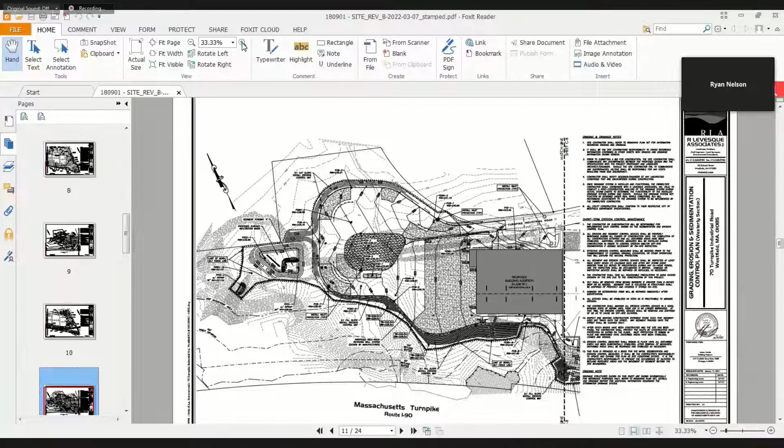Let me pull up the plan here. So Tom, I'm assuming you read all the comments? I did. I didn't understand a lot of them, but I did read them. Yeah, there's just technical things that, if I remember, let me see if I can pull up one of them.

Comments were about the operation and maintenance plan, which is, as you know, the long-term plan of how often things should be inspected, how they should be cleaned out, at what intervals. So there were comments about that. There was construction sequencing, just clarifying that, which was included on our plans. We added the snow storage locations. I guess to answer your question, it's just a large area of proposed surfaces with a decent pipe network system with multiple stormwater structures.

So it was just fine tuning and clarifying and tying up loose ends on all those items. Right. Was there also something about a pipe that wasn't adequate, wasn't big enough? Yes, let me see if I can find that.

I don't know if you can see this comment letter being shared, but number 5 said the hydraulic analysis included in Appendix D of the stormwater report identifies drainage pipes with flow exceeding the pipe's capacity. Please review and adjust pipe size if required. Our response was the hydraulic analysis performed on the pipe network utilized the 24-hour 100-year storm event, and while some surcharging within the conveyance pipe is anticipated, the analysis did not result in water surcharging above the rim elevations of any drainage structures in the paved areas.

So what that means is, although the stormwater flows may during a peak time exceed the capacity of the pipe, throughout the whole length of the pipe and the stormwater inlet structure itself, it had enough volume to hold and contain all that peak flow. So it didn't back up enough where it surcharged out of the inlet or the catch basin and into the parking area. Huh, I see.

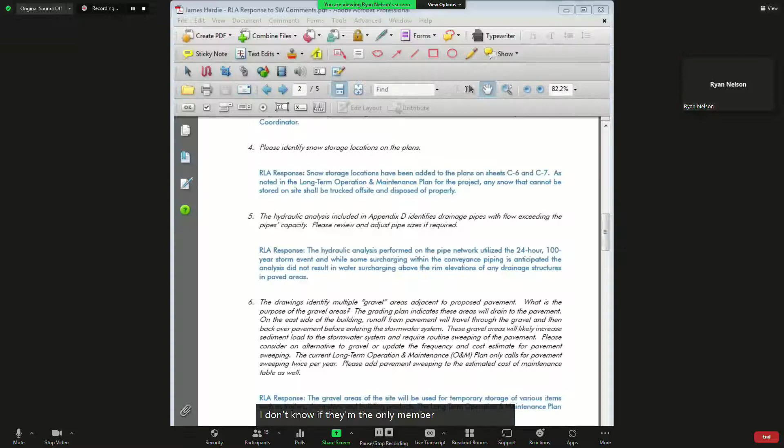Excuse me, Ryan, I cannot see the letter. I'm just looking at a charcoal screen on the left side. Just wondering if you could look at that again. I don't know if I'm the only member. How about that? Does that look any better? Yep, now I can see it. Okay, thank you. Sure, thanks.

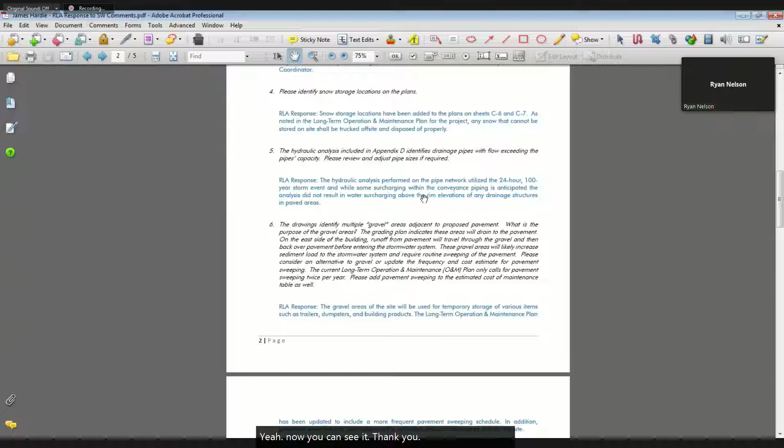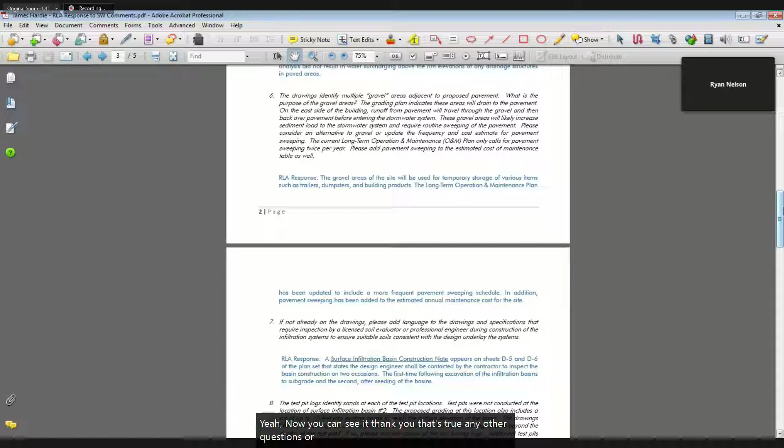Any other questions? I guess I'll just add that Colleen did forward that to me, and I was rather impressed with the responses from you guys. They certainly answered any of my questions.

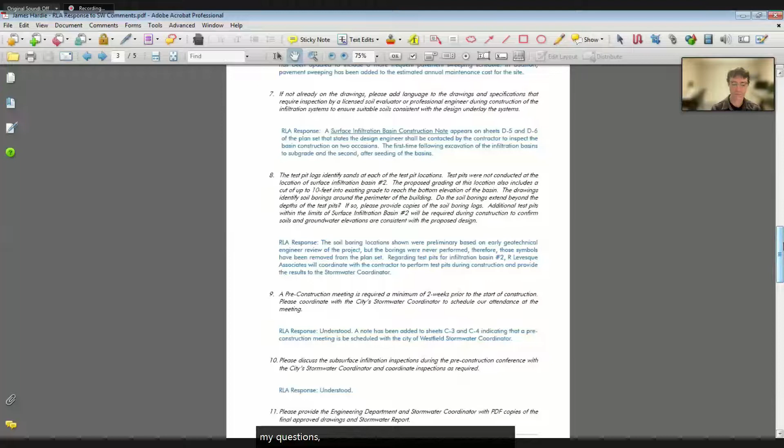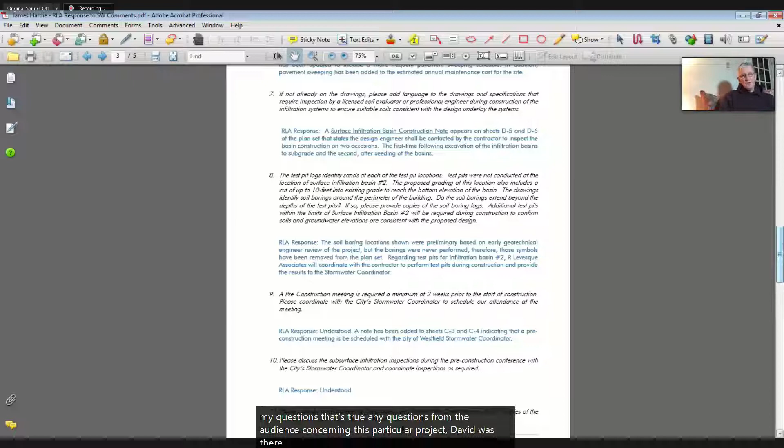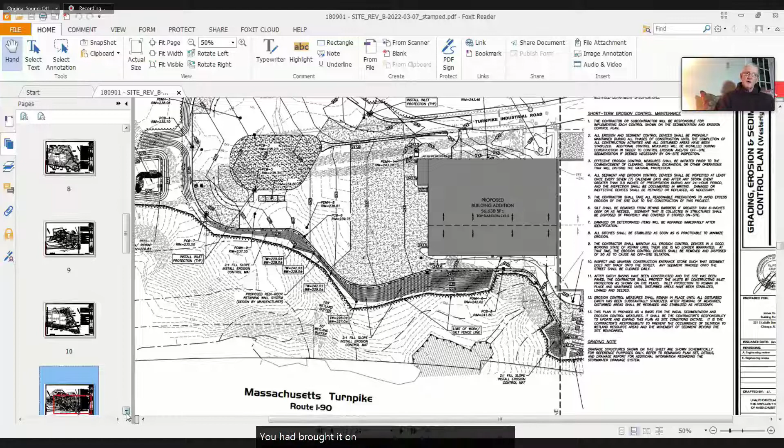Any questions from the audience concerning this particular project? David, was there one part of this? I'm trying to recall the original drawing, but there was one section where the new project came awfully close to the 50-foot line, if I'm remembering correctly. Do you recall that was your issue? You had brought it up. Am I remembering this correctly? There is a spot. You want to show us that, Ryan?

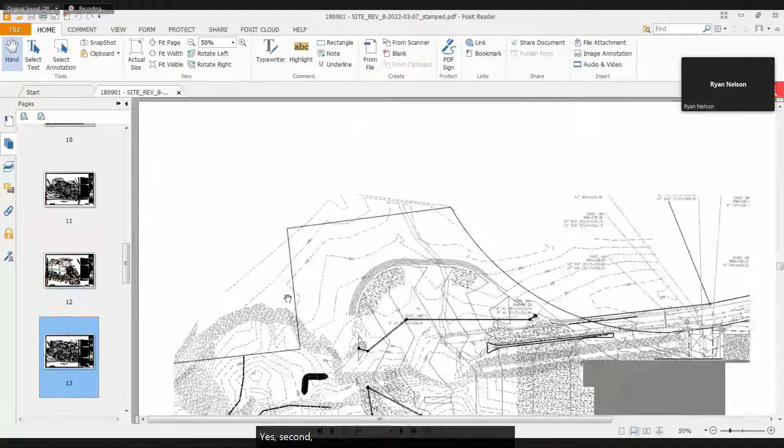Yes, one second. Okay, so this heavier, darker line here is the 50-foot buffer. Although our silt fence goes along the top of slope, our edge of pavement line isn't being expanded. So there's a strip of grass alongside the paved area within the 50-foot buffer, but it will remain grass. We're not doing any new work within that inner 50. It's just this little sliver right here between the silt fence line and the 50-foot buffer.

If I'm standing out in the road, looking at the existing building, where exactly is this? Is this the far right corner? Yeah, if you're standing at the main road looking at the building, this is the back right corner.

All right, but not a concern, is that what I'm hearing? They're keeping it as a grassy area. Plus, there's a steep bank right next to it, so they're not going to get down into that bank and disturb that. Correct.

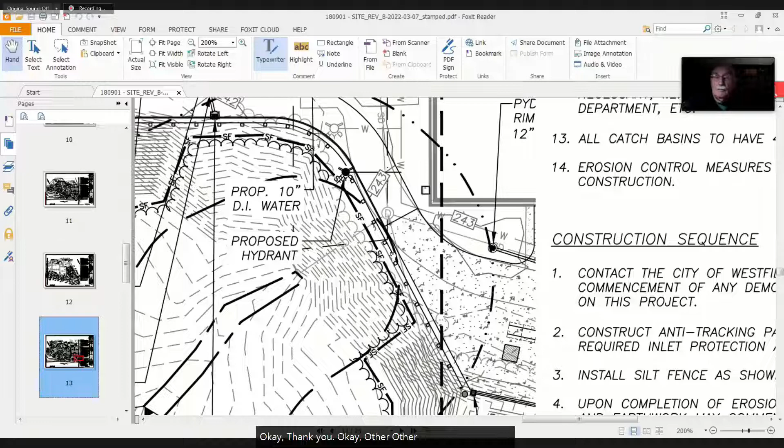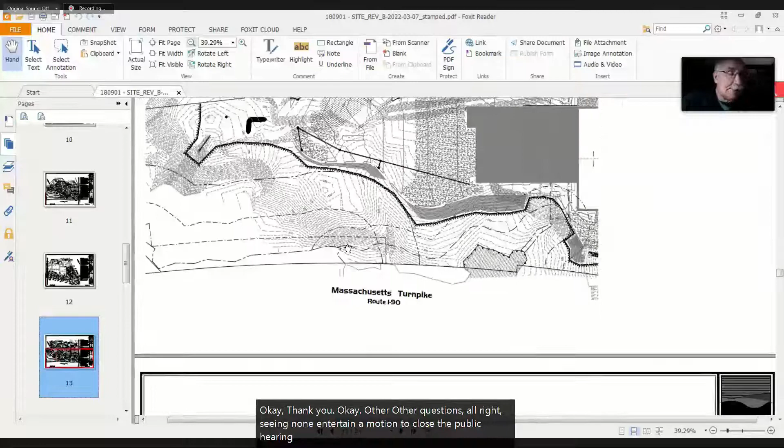Okay, other questions? All right, seeing none. I'll entertain a motion to close the public hearing. So moved. Do I have a second? I'll second it. Okay, any further discussion? Seeing none, all in favor?

Jim, yes. Carl, yes. Bob, yes, yes to close. And Tom, yes. Thank you, yes. And I'll vote yes as well. Okay.

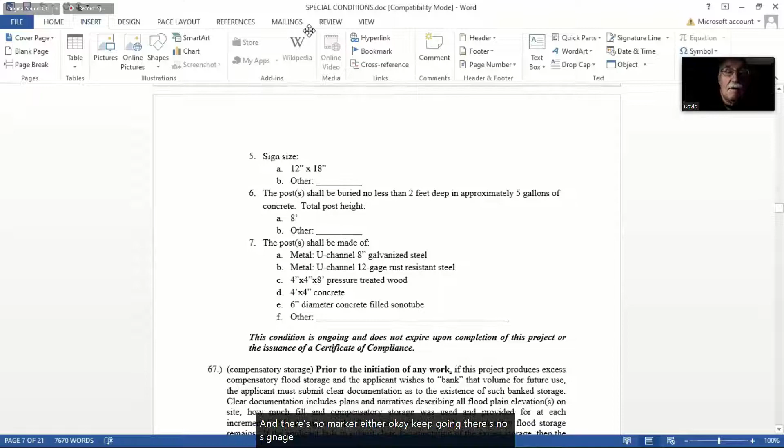There's no Title V, Ryan. I don't think. And there's no water quality certification, no. Sorry, there's no markers either. Okay, keep going. There's no signage. There's no storage. No basins.

69, okay, they were going to tag trees on the limit of work before the pre-construction meeting. So just make a note of that, Colleen, so that we can know where their cutting is going to stop. So what do you mean by that, David? Within 100 feet of the resource? Well, the limit of work. They're cutting a lot of trees, but they're going to mark the edge of the cut so that we can look at it in the pre-construction meeting. All right, good, yes, that's good. Yeah, on the plans there's a limit of work. We want to make sure they don't cut beyond the limit of work. Okay, so they're going to mark those either with tape or some kind of way, and we'll check that at the pre-construction meeting.

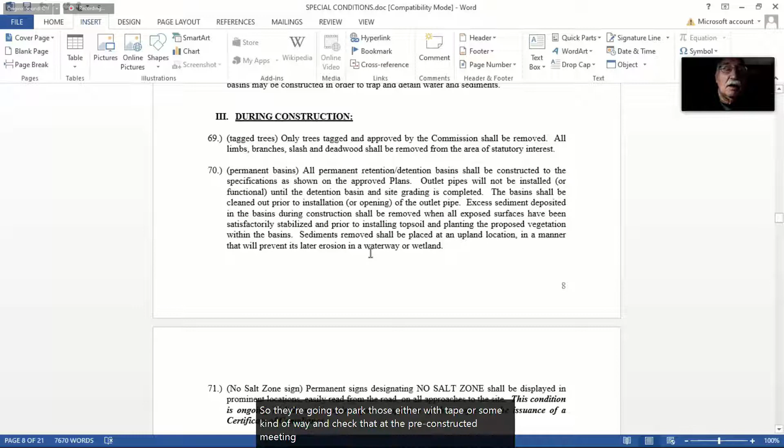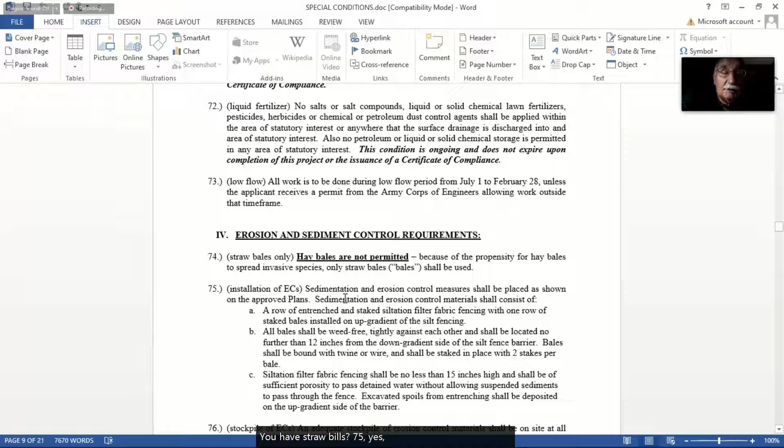Okay, 70, there's no basins. 71, we don't need that one. There's no 72, we don't need. 73, we don't need. 74, yes, straw bales. 75, yes. And 76, yes.

78, that might be a good one to check off because there's going to be a lot of area that's cleared of trees. What's the opinion of the committee on that one? Yeah, that seems reasonable to me. I'll echo that.

All right, thank you. Silt sacks, yes. 80, yes. 81, yes. Okay, stormwater requirements, yes, 82. 83. 84, yes.

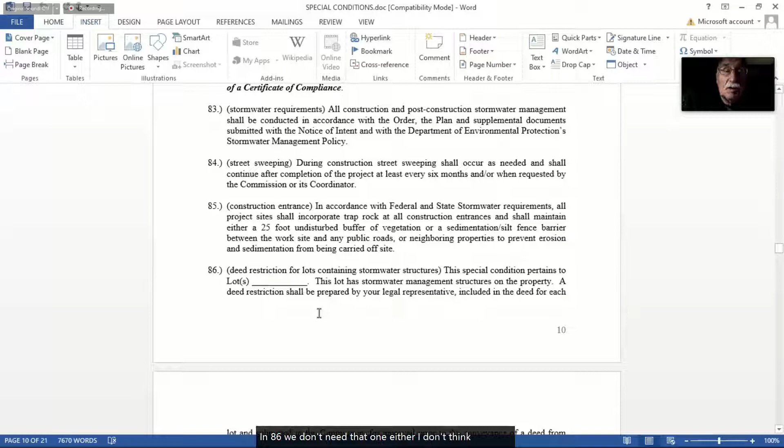There's already an entrance to the site, so I don't think they need an initial construction entrance. 86, we don't need that one either, I don't think.

There's no environmental monitor required here, so we can skip those. There's no dewatering. There's no dredging. There's no replication.

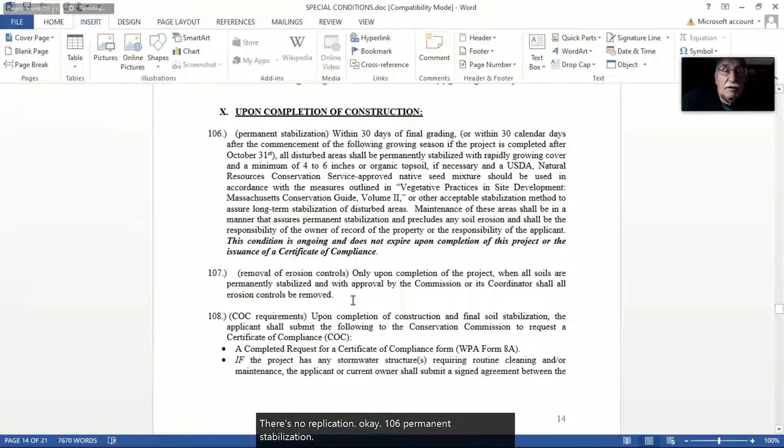106, permanent stabilization, yes. 107, yes. 108, yes, certificate of compliance requirements, okay. 109, yes. 110, yes. 111, yes. And 112, yes.

Okay, the next page, I think, is the bond. What do we think? Mr. Chairman, I normally contribute on these things, but I'm not familiar with the site as you folks are, so I'm going to defer to you folks. Any ideas? Bob?

There's going to be, as you pointed out just moments ago, a great deal of disturbance and a great deal of forestry happening. Whenever I'm asked this question, I try to think, what would it cost us to fix it if they get halfway through and it gets messed up and the city has to go in and make it right again? I don't know how greatly our resource area there would be impacted by too much water, too much drainage. Maybe that would be something to worry about. I'm always rather high in these, but I would say $10,000 is a number that we should consider.

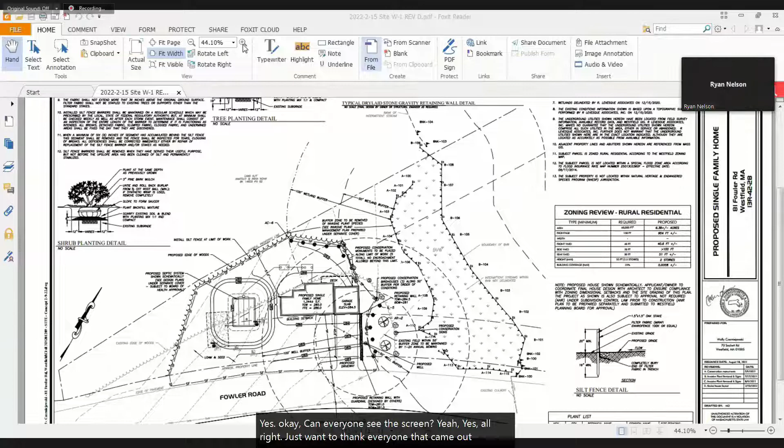Ryan, you're up again. Okay, can everyone see the screen? Yes. All right, just want to thank everyone that came out for the site visit last week. It was a beautiful day, and I think we had a clear understanding of what was being proposed and where the limits of work were.

Just to recap, the applicant, Pastor Wally, wanted to flip-flop the location of the house and the garage, keeping the same existing footprint or limit of the structure in relation to the wetlands. The other site changes that would occur was we raised the top wall of the foundation 2 feet, which in turn raised the grading around the immediate foundation of the house.

The driveway would be slightly steeper, and to keep any side grading along the driveway out of the 50-foot buffer zone, we're incorporating a retaining wall that would be about 3 to 3.5 feet tall at the house and then taper down to grade towards the street. The septic system was moved a couple feet away from the wetlands, and the limit of work will stay the same, as well as the limit of vegetation clearing needed for the project.

Site visit. Ryan had staked out every corner, the boundaries. He staked out where the boulders were going, where the signs were going, where the limit of work was. It was really easy to see the site and where everything was going to be because of the stakes he put out there. So I appreciate that, Ryan.

Sure, thank you for going out and reviewing. It did make it a ton easier. We should try to remember that for future projects, ask future applicants to use a similar method of identification, written, just penciled or penned right on the stake itself.

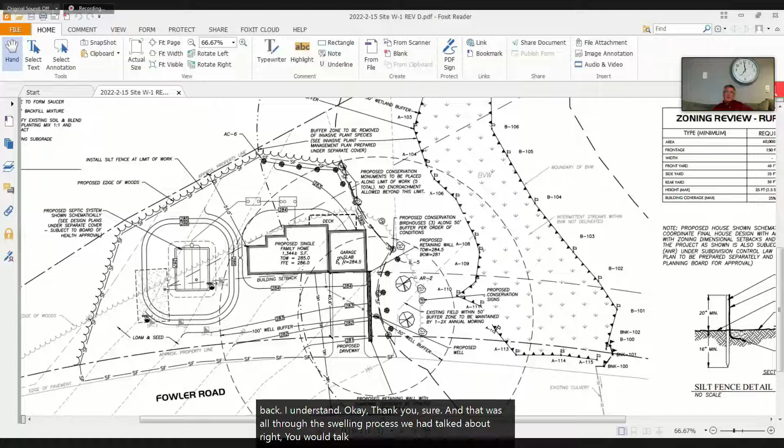Yes, there's a slight low point between the septic and the house, or I should say a break line. Let me zoom in. You'll see this 284 contour, there's a slight swale here. So water from the septic area would hit that break line on this side and go that way, and on this side of the break line it would go this way.

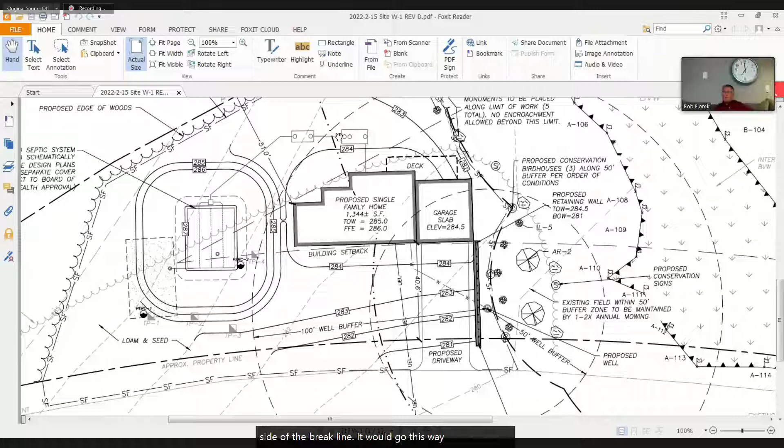Thank you. Ryan, I have a question - this is Jim. Out of curiosity, is this a raised mound septic system? I noticed the contour lines. Yes, okay, it is, huh. Groundwater was about 24 inches down.

So minimum 4 feet of separation from that, plus your system and the cover, it adds up quick. On the lower left side there's a rectangular call out - what does that represent? That is the proposed reserve area under Title V. If this was ever to fail, they have a viable location for a backup.

Actually Ryan, that was my next question - where is the reserve? And that's it. Okay, thank you. Sure. All right, any other questions?

And this was to amend our original approval of this project, basically to switch the house and the garage. Any other questions?

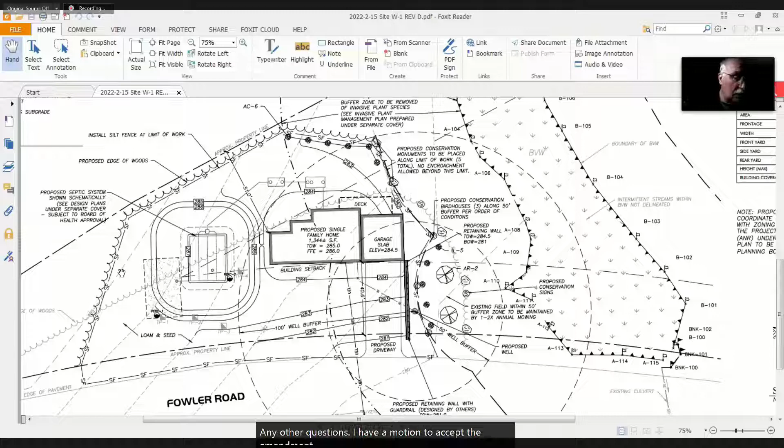All right, do we have a motion then to accept the amendment, or more specifically, a revision to the site layout? And who made the motion? Carl did. Okay, do you have a second? I'll second it.

Any further discussion? Seeing none, all in favor. Jim, yes. Carl, yes. Bob, yes. Tom, yes. Alex, yes. I'll vote yes as well. Thank you, thank you again Ryan, thank you guys, thanks for entertaining this.

And just wanted to mention, in the near future Pastor Wally would like to get started on this, so a pre-construction site visit would be requested when you guys get the chance. Just contact Colleen and she can get a date with you. Okay, thank you everyone, have a good night.

Thank you. Item 5, enforcement. There are none at this time.

Item B, 109 Whitaker Road, request certificate of compliance. Again, Bob drove past the property and said there's nothing going on at this time. Colleen, I don't think we need to see the photos since Bob has taken them. Yeah, there was nothing there, David. Okay, thank you, nothing at all. All right, entertain a motion to

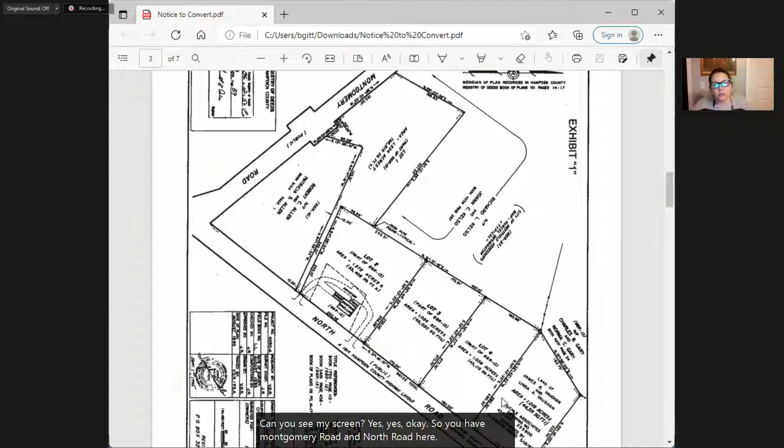All right, so can you see my screen? Yes. Okay, so you have Montgomery Road and North Road here, and they're just looking to convert this part of it, not this back part. So all of this property here is part of the property, but they're only looking to convert this to residential out of 61A.

There are no resource areas directly on their properties. There's a resource area back in this area, but not directly on the properties. So in order to build, I think they would have to at least file an RDA with us. But as far as any sort of resource area directly there, there's none.

Colleen, which two lots, lots 2 and 3? It's these ones right along here. It's all 3 of them - 4 of them, yeah.

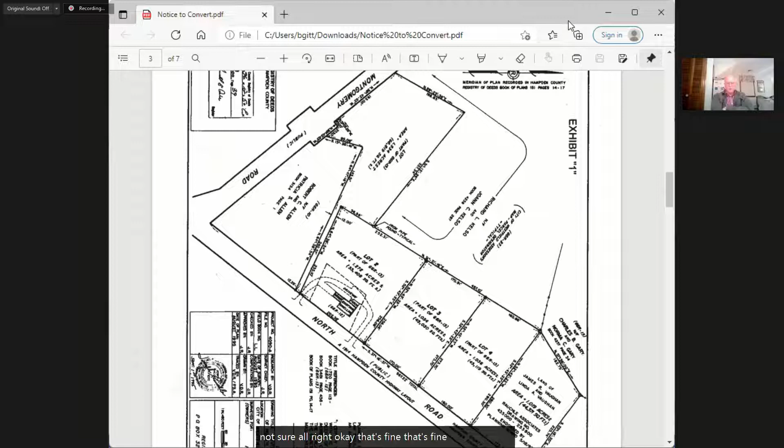And this is out in Wyben, right? Yeah, well this is Montgomery Road and this is North Road. I think that's why - oh, is that where it kind of comes, North Road goes in? I think there's a barn, like a red barn in the corner, maybe, or am I - I'm not sure. All right, okay, that's fine. I think maybe you're thinking of Russellville Road, Alex. I think you're right, Jim. Carl - yep, yeah, you are.

If I understand 61A, what's happening here is this is our opportunity to say that this is a really cool piece of property and we would like the city to own it. I think that we have an option to purchase the property now. I don't know, that would be a first right of refusal.

Tom, this is just, they're requesting to remove it from farmland, from agricultural. 61A is the agricultural designation. So yeah, it would go back on the tax rolls and there would not be the protections that 61A has applied to this. So they're looking to remove that from agricultural zoning to residential zoning.

And we're just supposed to, do we think that that's okay? Is there any issue with them doing that? All right, do we have paperwork on why or how or the reasoning we went into 61A in the first place? I mean, without a lot of information for us to consider before we go forward with this. Okay, I think I emailed you all the paperwork that the attorney gave me about it. So when did you email that, Colleen? Just as a point of reference so I could dig it up. Monday, February 28th. Okay, thank you, Alex.

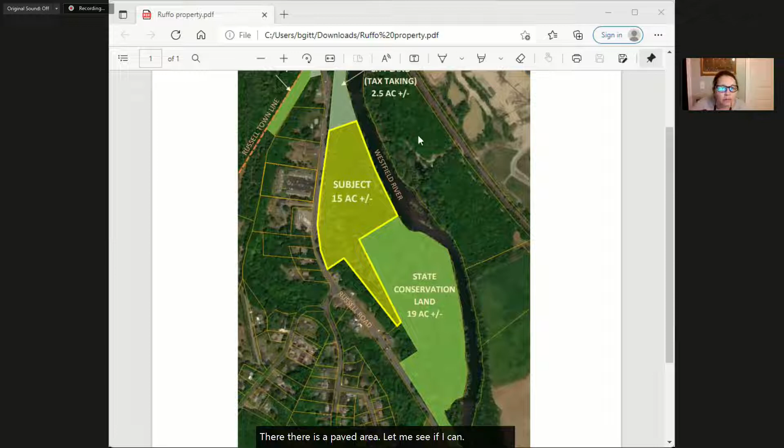Is that a paved area for trucks right now? There is a paved area. Let me see if I can... he sent me this, I'm sorry I can't zoom in, but I think there's like a little pull off right here, up from the gas station. Yeah, the Circle K is right there. Right. Yeah, I think it's right there.

All right, well, just again, since it's early, we can go out again on our own and take a ride out there, park and take a walk around, and see if it'd be nice to have that whole area conserved all along the river.

And so this would carry it that whole stretch right down to the bank. That would be really neat, probably all the way up to the Turnpike Bridge.

Did you want me to pull it back up? Sorry, I took it down. Was the tax parcel at the top of the map in conservation, or is that just in city possession? I think that's just in city possession.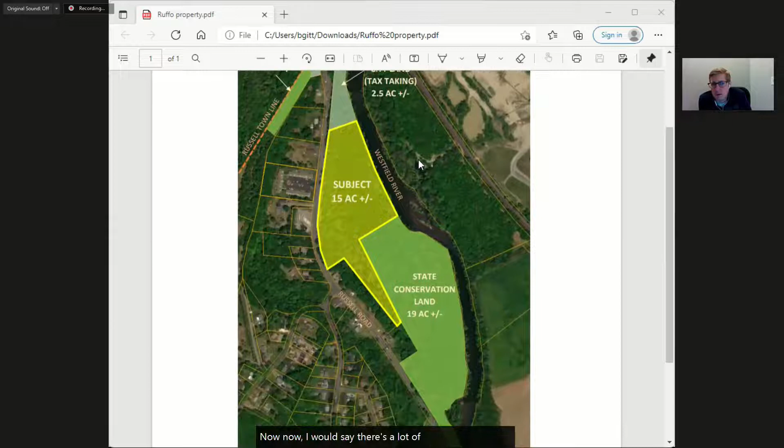It might be worth exploring as well. I would say there's a lot of people who park in that area. I don't think it's paved, I think it's a dirt area that trucks park in. Utility trucks will stage there when storms are coming, and then people park there in the summer and go down the bank to the river.

I know there's a lot of litter and stuff along the riverbank through here, but it could just become a repeat Earth Day cleanup for us. Those types of uses aren't terrible on this type of land, even though there's definitely some eroded footpaths down to the river that are less than ideal. But my opinion early on would be this is something we'd be interested in.

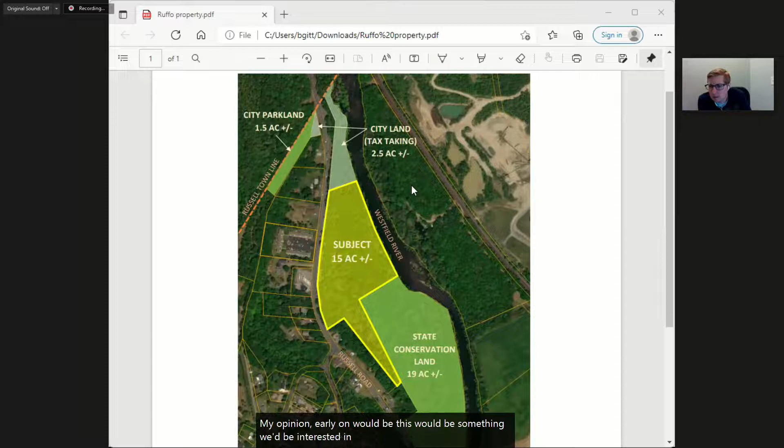All right, so yes, go out and take a look at it, and then we can see how Jay is progressing in his quest to take the land. Okay, so I'll tell him we are going to look at it and then we'll make a decision later.

Item A, Earth Day. Are we planning anything this year? The mayor is asking. We don't have a coordinator at this point, so I don't know what to tell you guys. What is Earth Day this year? It's usually April 25th. That's not enough time, and we don't have a coordinator.

Actually, it's April 22nd this year, Colleen. Okay, which is not enough time. No. All right, so I'll just let the mayor's office know that this year we're out.

Item B, Wetlands Ordinance Update. Again, it was approved by the council last week. As I noted, I talked to the clerk's office today. They need to write up the minutes and then send the minutes and the vote to the mayor, and then he'll sign the ordinance. The clerk's office said it should be done this week, so I'll let you know as soon as I find out.

So do we know when that would become effective? As soon as he signs it. That would be my assumption. Oh really, okay. I may be wrong, but that would be that. Hopefully that's what's going to happen. All right, thanks for your efforts, David, on this also.